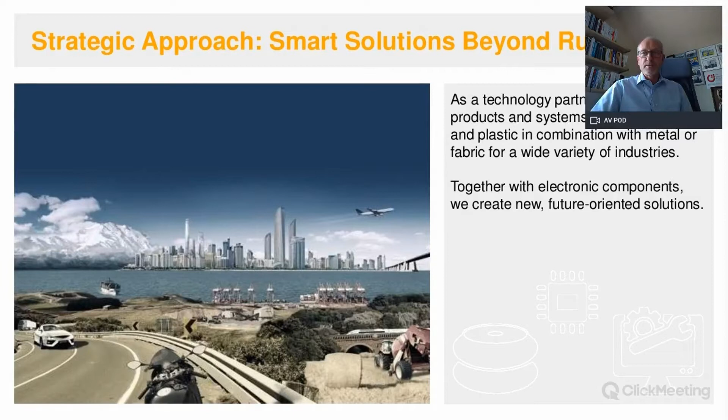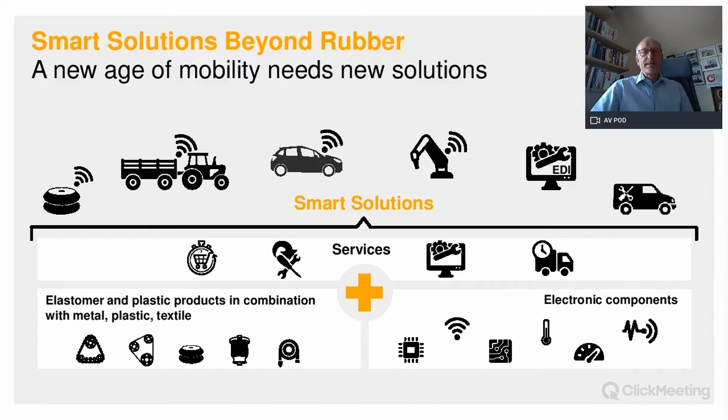In the beginning, I will show you a little bit more information about the company ContiTech. ContiTech is part of the Continental joint stock company, connected with the business outside of the tire business, but connected with the rubber business. ContiTech is on the way into the new age of mobility and a new age of technology development, connecting the products they have over years together with electronic components, mainly out of the automotive sector, putting them together with services in order to get smart solutions for the customer in various branches.

In the industry, for the conveyor belt manufacturing industry, Continental is one of the leading brands worldwide. The conveying solution company is producing conveyor belts in many locations worldwide. They have more than 6,000 employees, and the turnover during the last year, 2019, was 1 billion euro.

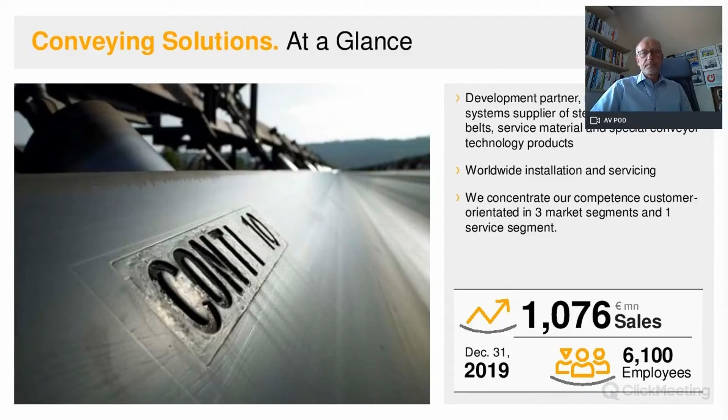The company is producing conveyor belts and solutions for the full chain of the process, starting mainly with excavation and in-pit crushing, transporting with conveyors and steep angle conveyors, transporting further with long distance conveyors, and of course many conveyors in the processing plant as well, for storaging and distribution.

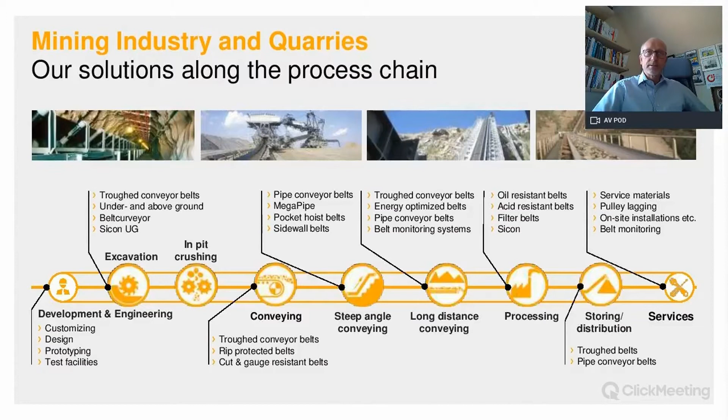For all these stages in the process, ContiTech is offering services as well. We understand a service offer with a 360 degrees view, and we have a complete picture of application of conveyors.

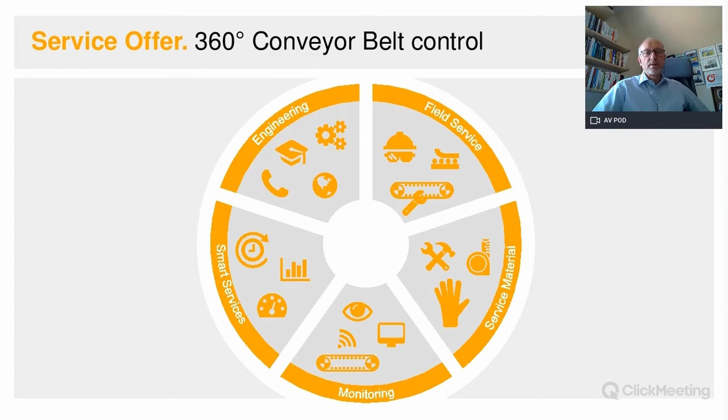It means we are providing not only the belt, we are providing field services locally and globally. We can supply service materials. We have monitoring systems for predictive maintenance. We are doing engineering support in any stages of development, of supply, and putting into operation. And of course, we are developing smart services for our customers.

Why are we doing so? Because we believe that only by providing solutions can we minimize the total cost of ownership of any device, of any product. It means as well for belts, for conveyor belts.

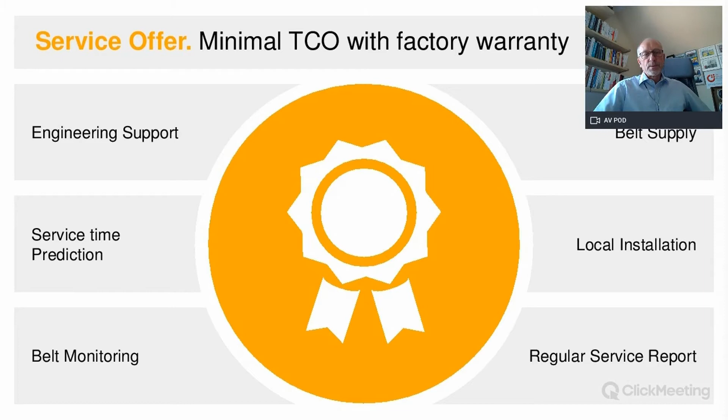What does this mean for conveyor belts? We are supplying the belts, we are installing them, we can provide regular service reports, engineering support. We can, with the smart services, provide service time prediction, and of course we can monitor the belt in function.

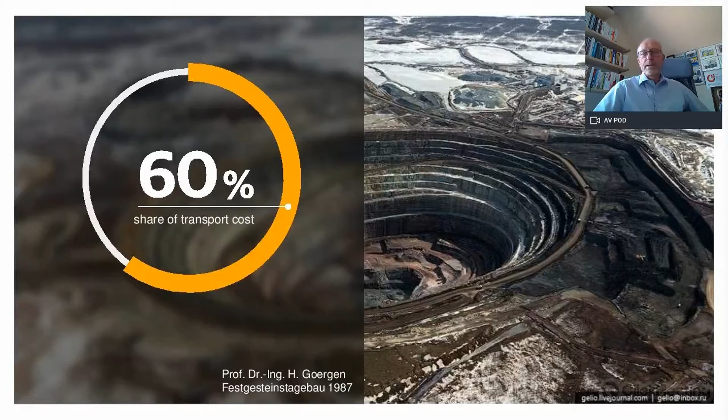And all this is important. Why? Because if you are thinking about the most effective way of transportation, if you are thinking about lowering costs, saving costs at your location, saving the cost per ton that you are transporting, you have to think about the transport. The transport takes up to 60% of all investments and operational costs. That's why it is very important to use the best, most effective technology for big mass transport, for bulk transport.

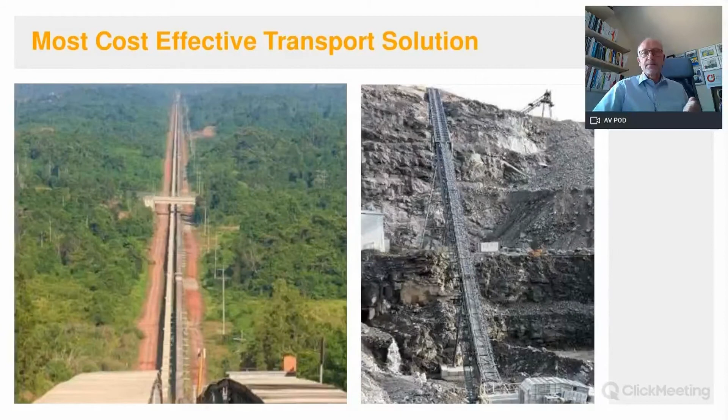In these special cases, as you can see on the slide, in very long conveyors and very steep angle conveyors, it is absolutely necessary to use predictive maintenance in order to be sure this conveyor will work without any unexpected downtimes. The first stage of such behavior is that you have information about the working conditions of your conveyor, and one of the most important parts in the conveyor is the conveyor belt. Our monitoring systems can provide you all the necessary information about the conditions of the belt.

The most problematic and dramatic problems can arise if you have issues like cord damage inside the rubber that you cannot see from outside, or problems with the splices of the steel cord conveyor belts. It is not visible to your eye, but the monitoring system can measure the differences and the signals. Our systems can also minimize problems if you have a belt rip, and all this together makes it possible to organize predictive maintenance and avoid emergency stops.

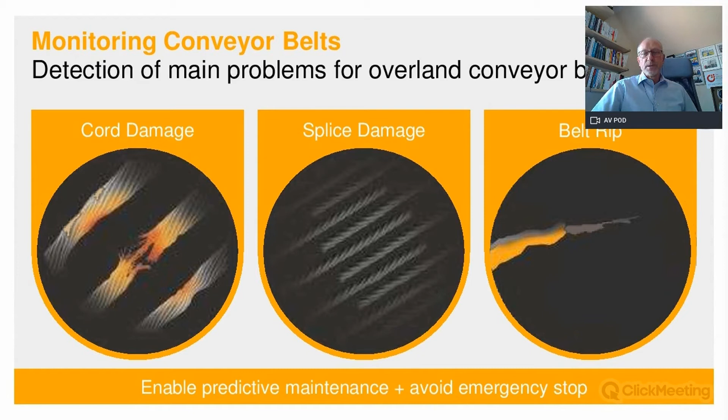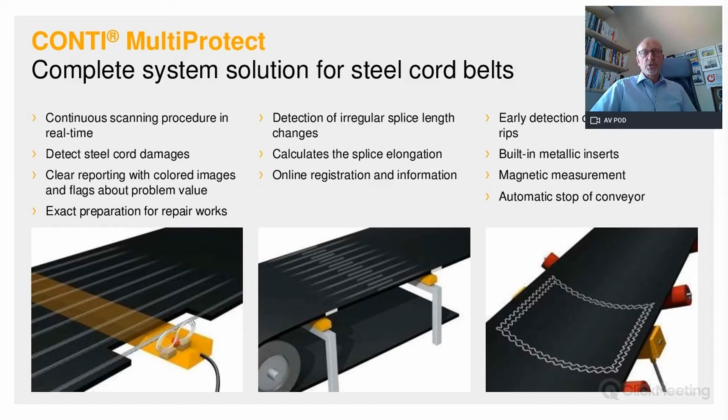As I showed you already, these three problems we can measure. On the left side, you see clearly how the system measures with magnetic fields the condition of the ropes inside the rubber. We can also measure the situation in the splices and the difference in measurements over a certain time. And on the right side, the usual system to stop the conveyor in cases of belt rips.

In one system, we have collected all these measurements together, and this system can be installed permanently at the belt. The name of the system is Conti Multi Protect. This system permanently measures the working conditions of the steel cord and the splices, and can measure the degree, the position, and when these failures have occurred.

Based on this time signal and time information, you can predict when the failure will be so severe that it needs repair, and you can previously define how much material you need, how much time you need for this repair, and you can very effectively organize your repair works, your maintenance works.

The same results you can get if you are using the mobile solution. It's the same system with the same output, but it is not installed permanently - it's installed for a certain time.

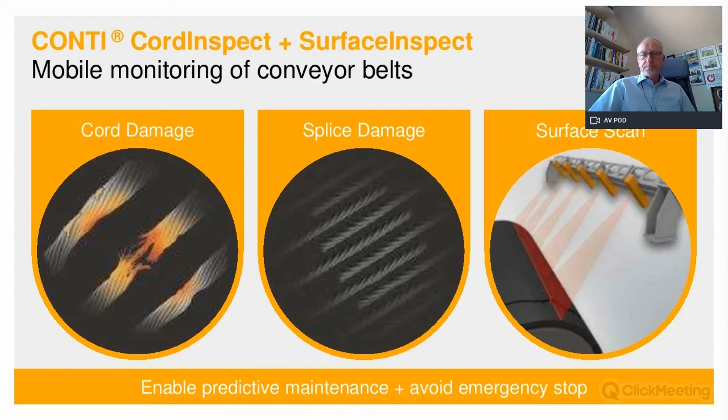We are coming with our team to your location, measuring all necessary data, and then you will get from us a report based on our measurements.

These reports are very understandable and very clear. You can see here on the right side the gray picture, and on it you have all necessary information about your belt, about the failures in yellow, about the splices in blue, and where these failures are located. It is very easy to understand where you have to repair.

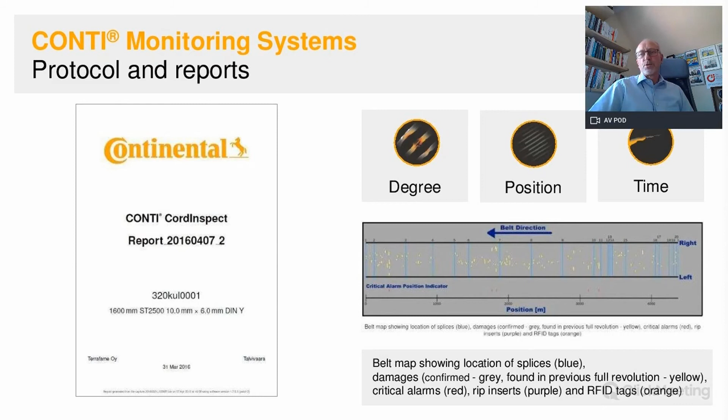And very important - if we are talking about Industry 4.0, we as Continental are able to manage all this information about the belt and much more.

For this handling of information, we are offering to our clients and distributors a special application, the Conti Plus web application and mobile application. This system is collecting all this information, and you can use it to organize your technical data, to have access every time and everywhere, to speed up information exchange, and to have a very tight cooperation and communication with your supplier.

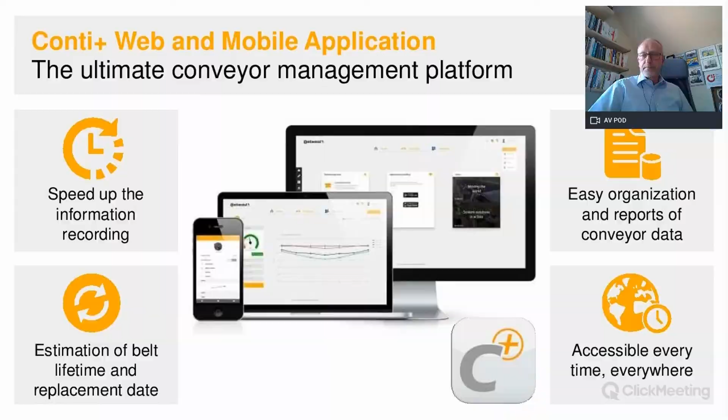Why are we doing so? This is the most important question you asked me - why we are doing this and why this is so important. I think it is very important to have full transparency if you are working with certain equipment.

For a conveyor it is the same story. If you would like to lower the costs and save costs over a long term, you have to have transparent costs. Our systems help you to get this transparency. If you have this understanding, you can reach the minimal total cost of ownership.

This is our belief, that you can reach this target with us, and I think this is very interesting for any user of conveyor equipment. Based on the full transparency and minimal total cost of ownership, you will have a better cash flow. What is very important - because unexpected downtimes cost a lot of money - you can minimize them using this predictive maintenance information base we have presented in the last few minutes.

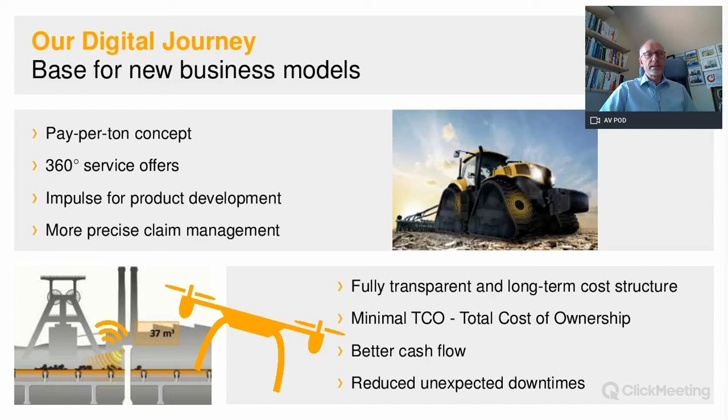In the end of my presentation, I would like to show you two very interesting reference projects we have been involved in and installed last year. The first one is the strongest conveyor belt worldwide - this installation of an ST10000 was done in Chile.

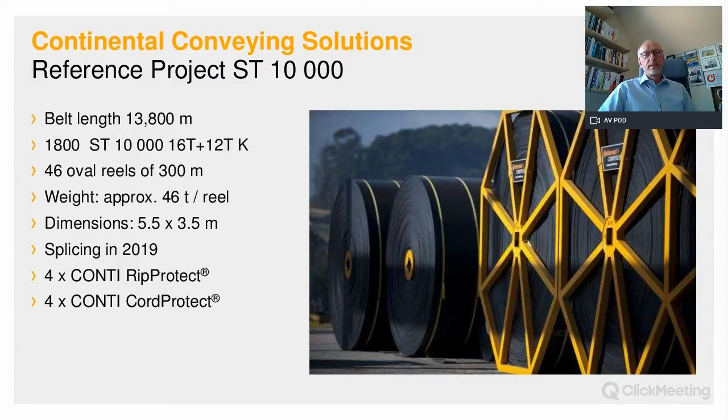We have supplied the belt, spliced the belt, and delivered 4 RipProtect systems and 4 CordProtect systems. This conveyor was already given into operation, and the customer is very satisfied. At the moment, we are working on putting into operation our monitoring systems as well. What is very important for us is that this is not only the strongest belt worldwide, but this belt has a very nice parameter for splice efficiency.

The splice is the most critical part in the conveyor, and if you reach a splice efficiency of about 60%, you can be sure that this belt, even under very harsh conditions, will work for a long time with very low maintenance and operational costs.

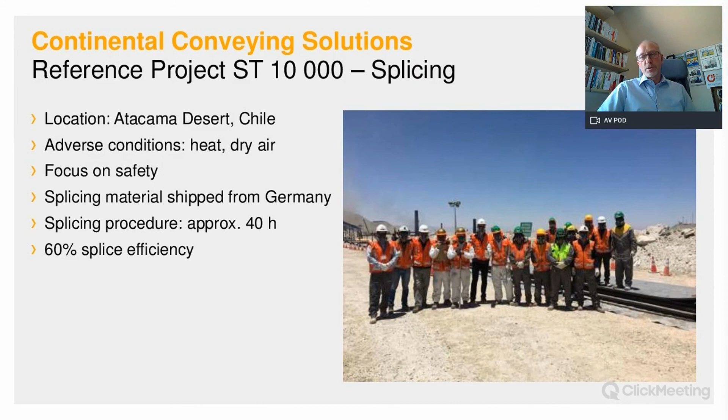The second very interesting application is a vertical conveyor. Vertical conveyors are mainly used in the industry sector - cement industry, chemical industry, and things like this. But in mining, you will not find such kind of application so often.

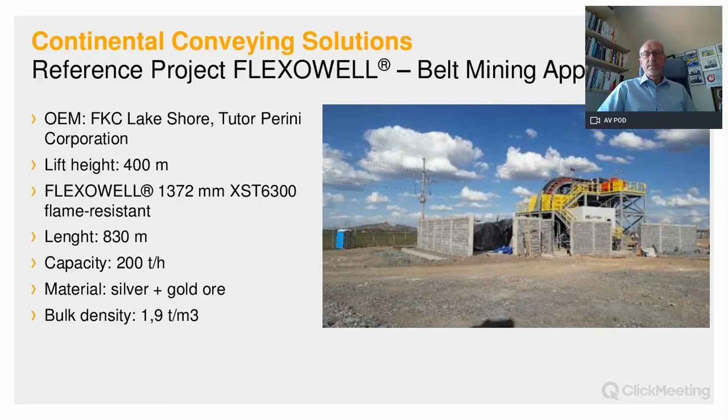What is interesting here is that we have a Flexowell project in a mining application, and the lifting height is 400 meters. Up to now, it was possible to have up to 100 meters lifting height. Now we have supplied a belt and installed, together with the OEM, a 400-meter design. We are transporting 200 tons per hour of silver and gold ore with this belt, and the customer is very satisfied with this solution.

I think this is a very nice solution for many miners who would like to have easy transportation with a very low energy level. As you can see, this application doesn't need a big infrastructure - we have on the surface and in the underground 2 driving stations, as you can see on the picture, and we are elevating 200 tons per hour in a very easy way.

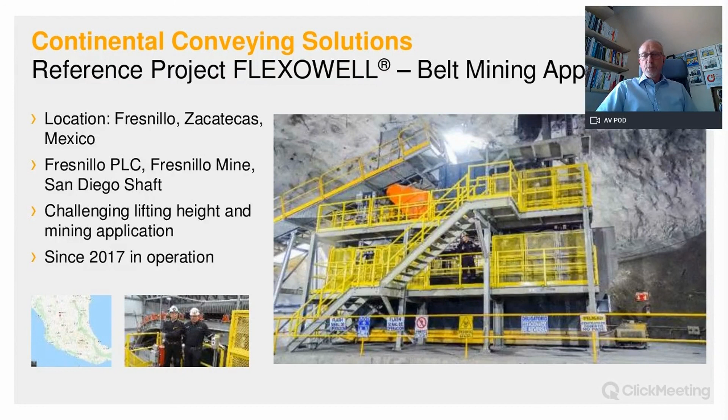That's all for today, and I hope it was interesting for you. Get in contact with me, get in contact with our sales partners worldwide, get in contact with our main location in Northeim, Germany, and we will support you in transporting heavy bulk streams and using conveyor belts in mining applications and any other industry application.